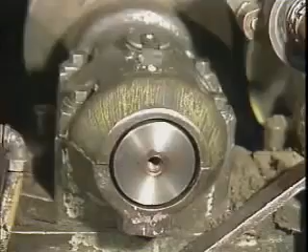Whenever movement takes place between surfaces that are in contact with each other, friction, or resistance to the movement, occurs. Friction between the moving parts of industrial equipment can cause excessive heat and wear. So lubrication is used to help reduce and control friction.

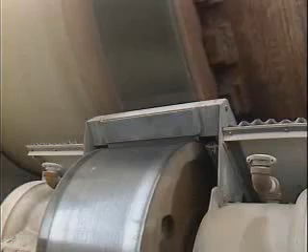Lubrication is the act of applying a substance called a lubricant that creates a slippery barrier between surfaces that would otherwise come in contact. In this part, we'll look at some of the types of friction that can occur. We'll also look at different kinds of lubricants and describe various levels of lubrication.

Moving parts generally experience one or more of three basic types of friction: sliding, rolling, and fluid. Sliding friction occurs when one surface slides across another. This type of friction offers the most resistance to motion, so machines are usually built to minimize or eliminate it.

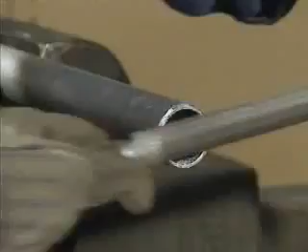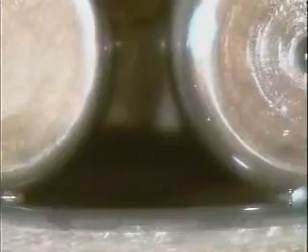One way of building a machine to minimize sliding friction is to place rolling elements between the moving surfaces. This is the principle behind rolling contact or anti-friction bearings. Although rolling contact bearings are used to reduce sliding friction, they do experience another type of friction, rolling friction.

Rolling friction is the resistance to motion that occurs when one object rolls over the surface of another. Rolling friction is considerably less severe than sliding friction, but rolling contact bearings must still be properly lubricated to reduce heat and wear.

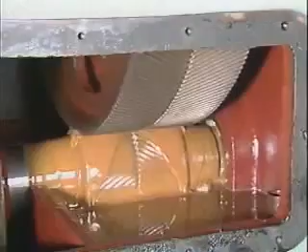Another way to reduce sliding friction is to separate two sliding surfaces with a film of lubricant. As long as the surfaces don't touch, sliding friction is eliminated. Some fluid friction exists within the lubricant, but it's much less than the sliding friction. Fluid friction is the resistance to motion that exists in a fluid. For instance, fluid friction is what makes it difficult to walk rapidly in deep water.

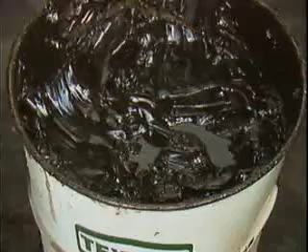Three common kinds of lubricants are liquids, greases, and solids. Liquid lubricants are oils. Mineral oils, which come from refined crude oil, and synthetic oils, which are man-made compounds, are commonly used in industrial applications.

Greases aren't strictly liquid or solid. Instead, they typically soften when the temperature rises and stiffen when the temperature falls. Solid lubricants are made from substances that retain their shape under normal conditions. Solid lubricants include some forms of metal, such as molybdenum disulfide, and several solid chemicals, such as graphite.

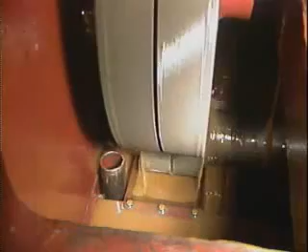When they act as a lubricant, the solid materials create layers that slide over one another. This reduces the friction that would occur if metal parts were in direct contact. Solid lubricants, such as the material whose trade name is Teflon, are also used as chemical coatings that prevent metal-to-metal contact by providing a solid covering for a metal surface.

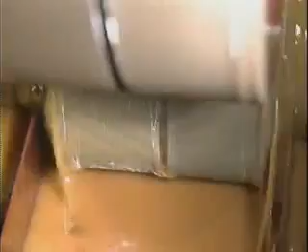Chemical coatings are generally used in combination with another kind of lubricant. For example, if an oil film breaks down and allows two surfaces to come in contact, the chemical coatings provide backup lubrication.

Different levels of lubrication are possible. One level is no lubrication. When there's absolutely no lubricant between moving surfaces, the surfaces are dry. This condition causes the maximum friction between moving surfaces and should be avoided as much as possible, except for applications such as braking, in which maximum friction is desired.

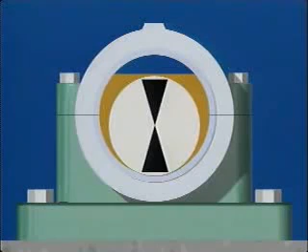A second level of lubrication is mixed film lubrication. To better understand what happens when this occurs, we'll use this illustration that shows a highly magnified portion of two mating surfaces. Under magnification, you can see that the mating surfaces actually have many irregularities, or peaks and valleys.

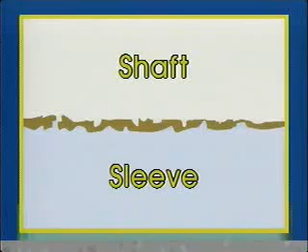Mixed film lubrication occurs when the mating surfaces are only partially lubricated, and metal-to-metal contact occurs between the high points of the surfaces that are moving across each other. Part of the load is relieved by the lubricant, but the high points of the mating surfaces take most of the load, which results in friction and wear of the surfaces. Mixed film lubrication is by no means an ideal situation, but it is a common occurrence.

A third level of lubrication is film lubrication, also called full film lubrication. It occurs when moving and stationary surfaces are separated by a film of oil. Film lubrication is the preferred level of lubrication for bearings. To see the basics of how film lubrication works, we'll use this illustration of a plain journal bearing.

The bearing has a sleeve that surrounds a shaft. The space between the bearing and the shaft contains lubricating oil. While the shaft's at rest, the weight of the shaft squeezes most of the oil out from between the shaft and the bearing. This places the bearing and the shaft in metal-to-metal contact.

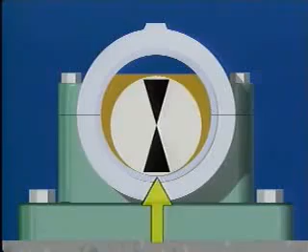But when the equipment is started, the shaft begins to roll slowly, and the motion drags oil underneath the shaft. Oil sticks to the shaft as the shaft turns, and the oil is carried between the two surfaces. The shaft is lifted away from the surface of the bearing by a film of oil. As the rotational speed increases, more and more oil is drawn under the shaft, and eventually, full film lubrication is achieved. The layer of oil supports the shaft and prevents it from touching the bearing surface.

In this part, we'll examine some of the most significant properties of lubricants. One of the most critical properties of liquid lubricants is viscosity.

The thicker lubricant has a greater resistance to flow, so it has a higher viscosity, while the thinner lubricant has less resistance to flow and therefore a relatively low viscosity. The thinner the lubricant, the lower the viscosity.

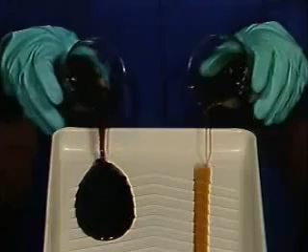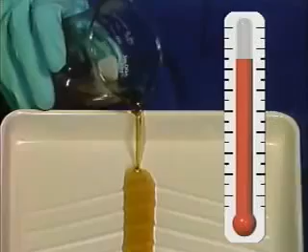Viscosity is affected by temperature. Higher temperatures cause lower viscosity because lubricants thin as temperature increases. On the other hand, lubricants thicken as temperature decreases. Both cases are significant because a lubricant won't lubricate properly if it's either too thick or too thin.

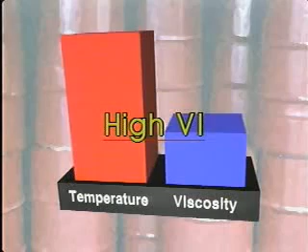If a lubricant is used where large changes in temperature occur, the lubricant's viscosity index is important. The viscosity index is a measure of the lubricant's viscosity change in relation to temperature change. If, when temperature changes a large amount, the lubricant's viscosity changes a small amount, the lubricant has a high viscosity index, or VI. If, when temperature changes a relatively small amount, the lubricant's viscosity changes a large amount, the lubricant

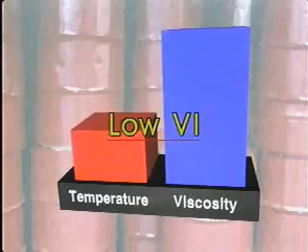has a low VI. Consequently, the temperature at which the viscosity measurement was obtained must be stated. This information is important because the same lubricant will have different viscosities at different temperatures.

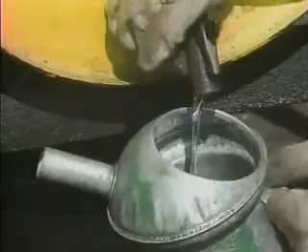In addition to viscosity, several other properties that affect lubricant performance are used by manufacturers as they develop lubricants for various applications. One of these properties is pour point. It's the lowest temperature at which a lubricant will pour or flow. Below the pour point, the lubricant will be too viscous or thick to flow by gravity.

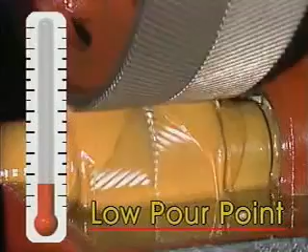A low pour point indicates that the lubricant flows at low temperatures. A high pour point indicates that the lubricant needs higher temperatures to flow. The pour point is especially critical in machinery that must run in cold weather and in equipment that's used in refrigeration systems.

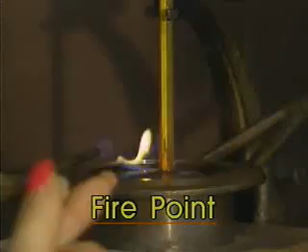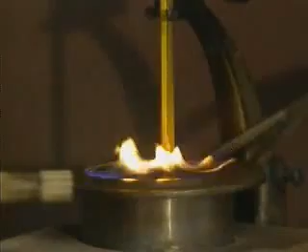Two other temperature-related properties of lubricants are flash point and fire point. The flash point of a lubricant is the lowest temperature at which the lubricant's vapor will ignite when it's exposed to a source of ignition. The fire point is the lowest temperature at which the lubricant will burn steadily when it's exposed to a source of ignition. This occurs because enough vapor is created to cause continuous burning. If either the flash point or the fire point is exceeded, a fire hazard exists.

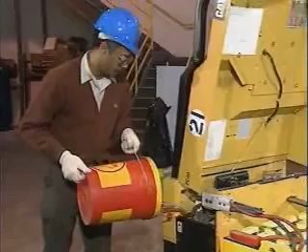Resistance to oxidation is another significant property of lubricants. It refers to a lubricant's resistance to reacting chemically with oxygen when exposed to heat and air. You see, many industrial lubricants are made from hydrocarbons. When the hydrocarbons are exposed to heat and air, the chemical reaction called oxidation occurs.

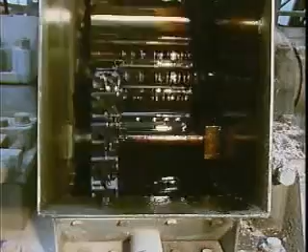Oxidation causes chemical changes that destroy a lubricant's effectiveness and lead to the creation of deposits such as sludge and varnish. Oxidation also produces acids that cause rust and corrosion. The oxidation process is normally slow, and over time, most lubricants do tend to oxidize. Oxidation can speed up, however, if the lubricant splashes around excessively or if it's exposed to high temperatures.

A lubricant's resistance to forming an emulsion is also important. Basically, an emulsion is a mixture or suspension of components that are difficult to separate once they've been combined. The process that causes the formation of an emulsion is called emulsification. A lubricant that resists forming an emulsion is usually desirable because an emulsion of lubricant and water has poor lubricating qualities.

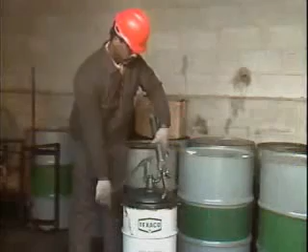Equipment manufacturers generally specify appropriate lubricants for their equipment, depending on how the equipment will be used. In turn, workers are responsible for making sure that they use the type of lubricant that's been specified. Various factors determine the appropriate lubricant for a given situation. For instance, pressure or load affects the selection of a lubricant.

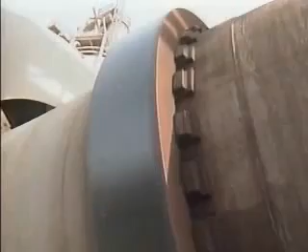An application with relatively high pressure requires a lubricant that won't flow away from where it's needed when the pressure increases, such as when gear teeth mesh. Applications that involve relatively high loads or pressures typically require greases, solid lubricants, or high viscosity oils. Speed is also a factor in lubricant selection because there's a higher rate of wear at high speeds than at low speeds.

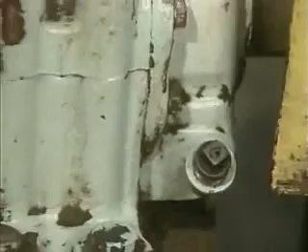Generally, low viscosity oils provide lower friction and better heat transfer at high operating speeds than high viscosity oils do. In short, low viscosity lubricants are more suitable for components such as certain bearings where the loads are light, the speeds are high, and the system is fully enclosed. High viscosity lubricants are more suitable for components such as open gears where the speeds are low, the loads are high, and the system is not enclosed.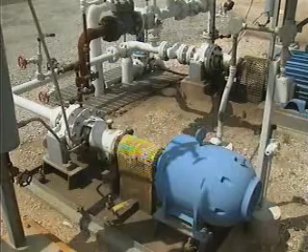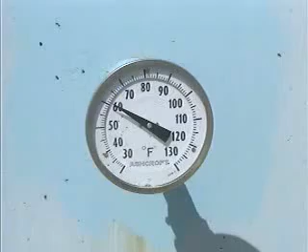Temperature also affects a lubricant's viscosity. If wide, rapid variations in temperature are involved, a lubricant with a high viscosity index is usually needed. Temperatures must not exceed the lubricant's flash point and fire point. On the other hand, temperatures must not be lower than the lubricant's pour point.

Substances or conditions in the environment where a lubricant will be used also affect lubricant performance. For example, a lubricant must be able to withstand chemicals that may tend to break down the lubricant. And if there's water in a system, a lubricant that resists emulsification is usually required.

In most cases, lubricants contain additives which also affect lubricant selection. An additive is a substance that's added to a lubricant to provide or improve a specific property. Such substances are usually added by the lubricant manufacturer.

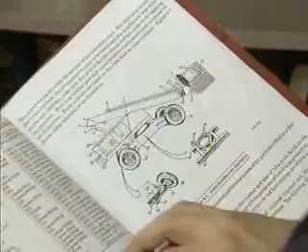To make sure that they use the correct lubricant for a specific piece of equipment, workers usually refer to the lubrication chart that's supplied by the equipment manufacturer. The lubrication chart applies only to that particular piece of equipment, and it should not be used as a lubrication guide for any other equipment.

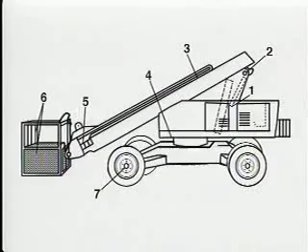Often, each lube point or equipment part that requires lubrication, as indicated on the lubrication chart, is shown and numbered on an illustration that accompanies the chart. In turn, the numbers from the illustration are listed on the lubrication chart, in this case, in the index numbers column. For instance, item number 2 from this illustration is identified as the boom pivot shaft on this simplified lubrication chart.

Reading across that line on the chart, you can find the number and type of lube points, in this case, 2 grease fittings, and the recommended type of lubricant and method of application, in this case, multi-purpose grease, abbreviated as MPG, applied with a pressurized grease gun or pressure gun. You can also find out how frequently the boom pivot shaft should be lubricated, which is every 10 hours.

Proper storage of lubricants is essential to prevent contamination and unnecessary waste of the lubricants, as well as fires, spills, and accidents. For these reasons, the federal government and many state governments have strict regulations that apply to the storage and handling of lubricants. In this part, we'll cover some basic procedures for ensuring that lubricants are stored safely.

After lubricants have been delivered, they're often stored in their containers for a long time before they're used. Depending on a facility's available space, the containers may be stored indoors or outdoors. Two major problems with outside storage are dirt and weather. So store lubricants in a location where there's a minimum of dust and dirt. Also, use a temporary covering like a tarp or a permanent covering like this three-sided shed to protect the containers from the weather.

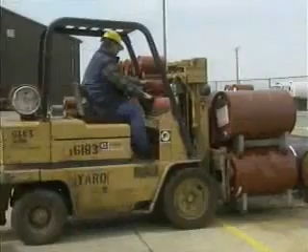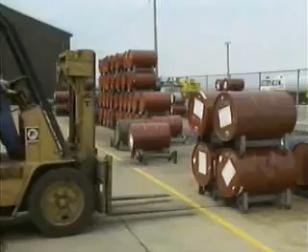Generally, metal drums of lubricant should be stored either upright on pallets or horizontally on racks that keep the containers off of the ground. You see, storing a metal drum on a rack keeps the metal of the drum from contacting the ground or standing water. This helps prevent the destructive chemical reaction of corrosion from occurring.

In addition, storing a drum on its side prevents water from collecting on the top of the drum. Water that's allowed to collect here can eventually penetrate the seal around the drum's opening and contaminate the lubricant that's inside the container.

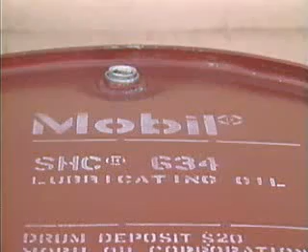Most lubricants are combustible, which makes fire a hazard that's associated with storing these materials. One reason for storing lubricants outdoors is to minimize the damage from a fire by keeping the lubricants away from buildings, equipment, and work, such as welding or cutting, that involve sparks or open flames. Also, always keep an appropriate type of fire extinguisher in the storage area.

When lubricants are stored indoors, weather is less of a problem than with outdoor storage. But contamination, spills, and fire are still hazards that must be dealt with. Store lubricants in a fireproof room or building that's clean, well lighted, and well ventilated. The storage area should have a fire extinguishing system that can be controlled manually as well as automatically. Also, keep an appropriate type of portable fire extinguisher in the storage room.

Position storage racks or shelves so that all lubricants can be reached easily. Make sure that all containers are plainly marked to identify their contents, and store the containers so that their markings can be clearly seen. If possible, store opened lubricant containers and containers of contaminated lubricants separately from new unopened containers.

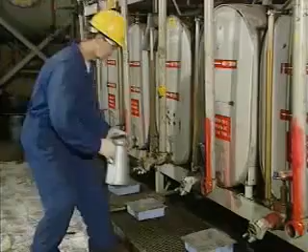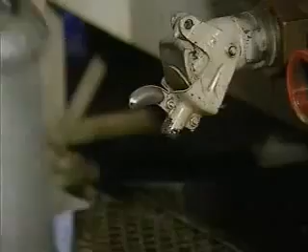To dispense lubricant from a drum by gravity flow, store the drum in the horizontal position on a rack and equip the drum with a spigot that has a drip-proof valve for withdrawing the lubricant. If you must store a drum in the vertical position, you'll probably have to pump the lubricant out of the drum. Store cans or pails of lubricant neatly on shelves or on the floor. Finally, repair leaks promptly and clean up any drips or spills immediately.

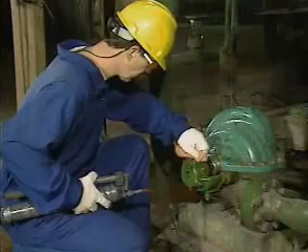In this part, we'll look at common types of lubrication equipment for industrial applications. We'll begin with a grease gun. Hand-operated grease guns, or lever guns, are often used to grease bearings. Typically, the nozzle end of the gun is attached to a grease fitting on the bearing housing, and the gun's hand lever is pumped to apply grease through the fitting to the equipment's bearings. Grease guns enable you to develop high pumping pressure with little effort.

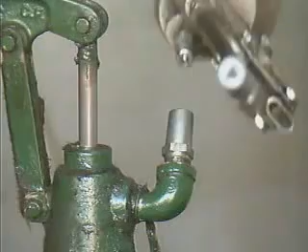In fact, grease guns can develop pressures in excess of 10,000 psi, which can damage seals. So you must operate grease guns with care. A very common way of filling some hand-operated grease guns is simply to slip a cartridge of grease into the barrel of the gun. Other types of grease guns can be filled quickly and easily with a filler pump that's clamped onto a bulk grease container, then attached to the gun.

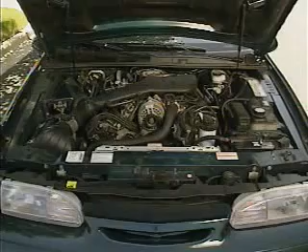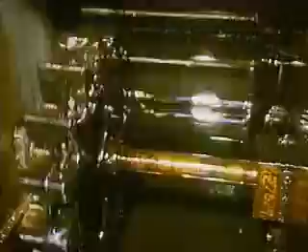Internal lubricators are typically used for the bearings of an internal combustion engine, an air compressor, or a gearbox. In this gearbox, oil is pumped from a reservoir through oil lines inside the machine. Then a gear that's mounted on a separate shaft rotates through the lubricant that's inside the gearbox and carries the lubricant onto the other gears.

In this part, we'll talk about some standard procedures and precautions that are associated with handling and dispensing lubricants. Generally, when a lubricant is needed in a facility, workers move the lubricant containers from bulk storage to a central location in the facility where the lubricant can be dispensed. If a lubricant is taken from outside storage in cold weather, it should be allowed to warm up indoors before it's used. Low temperatures can thicken lubricants and make them unusable until they've been thoroughly warmed.

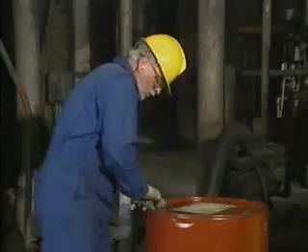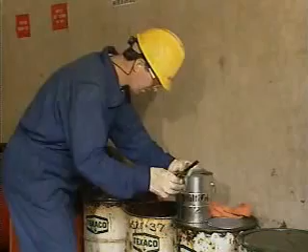As a rule, a lubricant container should be cleaned before it's opened to prevent dirt or debris from the container getting into the lubricant. When a container is opened and lubricant is removed, the container should be resealed as soon as possible to protect the remaining lubricant from contamination. Different lubricants may have incompatible additives, so when a lubricant is added to a partially full system, the type of lubricant that's added must usually be the same as the type of lubricant that's already present.

When more than one lubricant is dispensed from the same location in a facility, it's important to identify each lubricant properly. Of course, the original shipping container must clearly state what lubricant the container holds. But any time a lubricant is placed in another container, the new container must also be clearly and correctly labeled. Lubricant should never be returned to its original container after it's been removed. That could contaminate the entire contents of the container. Likewise, contaminated or waste lubricant storage must be clearly marked.

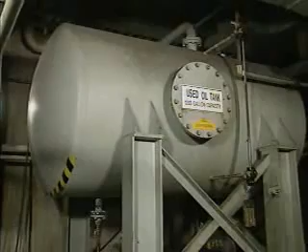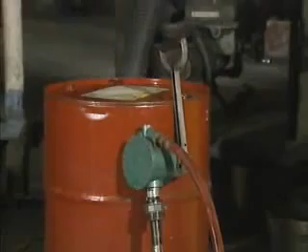Different methods can be used to remove or dispense lubricants from their containers so that the lubricants can be put to use. We'll look at two of the most common methods for dispensing oil. One way to dispense oil from a drum or a barrel is to use a barrel pump that fits into the container. The first step in installing a barrel pump is to clean off the top of the drum. Then open the drum, and if there's a drum seal, remove it. Next, clean the pump and insert it into the drum. And finally, tighten the pump securely to the drum.

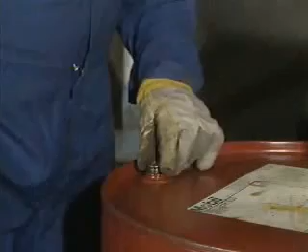For the barrel pump to work properly, the drum must be vented. This is usually done by removing a small vent cap from the top of the drum before you start to pump. When you're done pumping, replace the vent cap to prevent contamination of the lubricant. Another way to dispense oil from a drum is with a spigot that has a leak-proof valve. The drum must be positioned on its side.

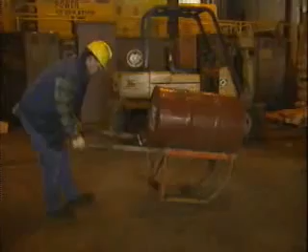Sometimes, a drum with a spigot is placed in a rocking frame. To dispense oil from the drum, the frame is rocked forward so the drum lies on its side. The drum may then be left in this position until it's empty, or if necessary, it can be rocked back into the upright position. With the drum vented, open the spigot and withdraw the oil from the drum. When the desired amount of oil has been withdrawn, close the spigot and the vent cap.

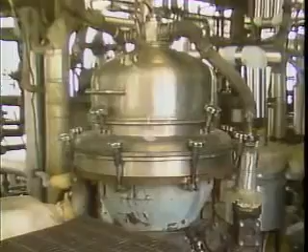When lubricating oil becomes contaminated or can no longer provide adequate lubrication, it must be replaced with fresh oil. Oil is usually changed according to a schedule that's established by the equipment manufacturer. Also, in many cases, contaminated oil can be purified and reused. Oils are often divided into several common groups based on the uses for which the oils are suitable. One group of oils is circulating oil. Circulating oil flows or circulates through a piping system or moves freely within a closed area.

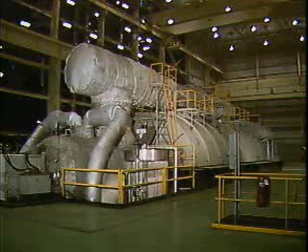The circulating oil group also includes hydraulic oil. Hydraulic oil is primarily used to transfer force from one component to another in a system. Sometimes, though, the same circulating oil is used for both lubrication and hydraulics. For example, large steam turbines are often built to use the same oil for lubrication and for hydraulic control. In equipment that's operated in low temperatures, a circulating oil's pour point must be low enough to allow the oil to flow freely. Also, the viscosity index of a circulating oil is very important if the system in which the oil is used experiences large changes in temperature.

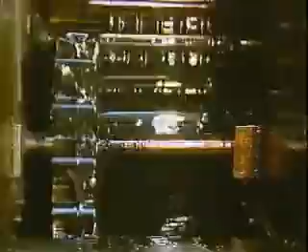Gear oil is a type of oil that's used primarily for lubricating gears, although it may be used to lubricate many other devices as well. Various gear oils are available. A gear oil may be a straight mineral oil, or it may contain additives to improve the oil's load-carrying ability and its performance in high-pressure applications.

Viscosity is a critical property for gear oil because an oil that's too thin will be squeezed out from between the gear teeth and won't protect them. But the oil must also be able to flow freely enough to help cool the gears. An oil that's too thick will cause the gears to overheat because of high fluid friction.

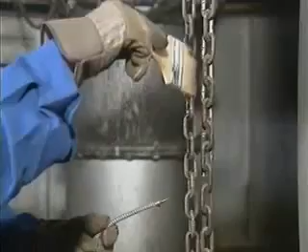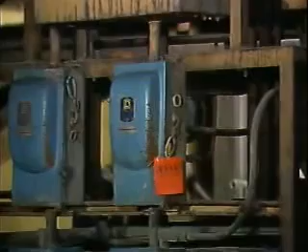Manual oiling often involves wiping or brushing oil onto moving parts, such as chains and wire rope. To prevent personal injury when applying lubricants manually, workers must always use the appropriate personal protective gear. Workers must also make sure that the equipment is shut down and properly tagged and locked out before they apply the lubricant.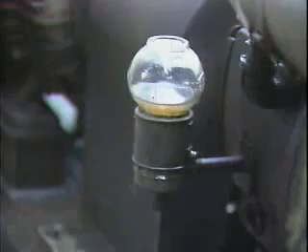Some bearings have a small oil cup or reservoir that dispenses oil automatically as the oil level in the bearing decreases. To maintain the proper oil level in the bearing, workers must check the level in the oil cup regularly and add oil as necessary. The oil cup should be cleaned before it's used. Dust and dirt that enter the bearing with the oil can lead to bearing failure.

Centralized oiling is a lubrication method in which oil is automatically applied to the moving parts of several machines by an independent, centralized oiling system, such as the one illustrated here. But to be sure that the proper oil level is maintained, workers must check the level in the reservoir on a regular basis and add oil when necessary.

Finally, applying oil to lubricate bearings is a critical maintenance task in most industrial facilities. One of the most common problems associated with lubricating bearings is over-lubrication. The application of too much lubricant can cause an increase in operating temperature and a decrease in viscosity. Then, if the lubricant becomes too thin, it can't carry the load inside the bearing. As a result, the bearing will fail and have to be replaced.

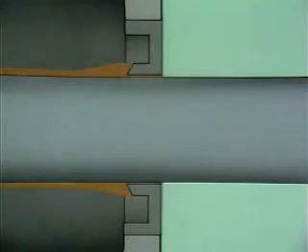Also, too much lubricant being forced into a bearing may burst the bearing seals. This in turn allows the lubricant to escape from the bearing while contaminants are allowed to enter. Certain properties unique to grease determine the appropriate grease for a particular application. One such property is drop point.

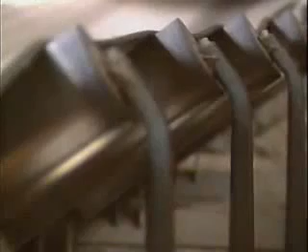Drop point refers specifically to the melting point of a grease. The term is derived from the method that's used to measure this property. The grease is heated slowly until fluid begins to drop from the grease. The temperature at which the drops form is the drop point. If the operating temperature in an area is higher than a grease's drop point, the grease tends to flow away from the area that needs lubrication. So a grease's drop point is normally considered the highest temperature at which the grease can be used.

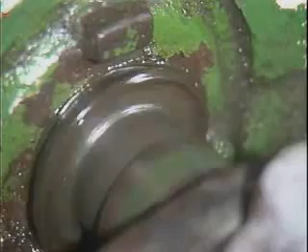Some greases don't have a drop point. Instead, when heat is applied, the grease begins to decompose chemically before it reaches the point where the thickener in the grease would break down and drops would form. A grease's consistency or stiffness is an important physical property for much the same reason as drop point is. If a grease is too hard, it will be difficult to apply. But if it's too soft, it may flow away from where it's needed. Either of these situations could result in inadequate lubrication and damaged equipment.

The consistency of a grease varies with temperature, and there's generally an increase in the softening of a grease as the temperature increases. For these reasons, consistency is a critical property to consider when grease is selected for a particular application. The National Lubricating Grease Institute, NLGI, has developed a widely used classification system of grease consistencies. In this system, grease consistencies are designated by NLGI numbers that range from 000 for the softest to 6 for the stiffest.

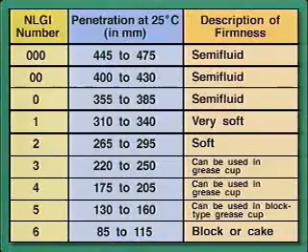If a grease must be pumped through a centralized greasing system, the grease's pumpability should be considered. Pumpability is a measure of how easily a grease can be moved or pumped through a centralized greasing system without clogging the pipes or the components in the system.

The water resistance of a grease is an important property if the grease will be used with machinery that can be damaged by water. Many greases break down or dissolve when they come in contact with water, but most greases that contain thickeners such as calcium or lithium soap, which are insoluble in water, resist water very well.

The ability of a grease to retain its chemical and physical properties when subjected to extreme temperatures or exposed to reactive substances is referred to as the grease's stability. In many applications, it's crucial to use a stable grease to protect the equipment that's being lubricated. Bearing applications are especially sensitive to instability.

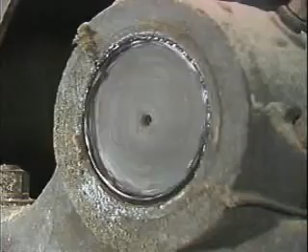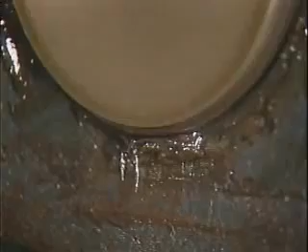If the grease in a bearing breaks down from the heat that's generated during operation, the grease will leak out and leave the bearing dry, causing the bearing to seize. A stable grease, on the other hand, resists breaking down due to temperature increases or exposure to air, water, or reactive chemicals.

There are various reasons for using grease, most of which depend on the operating conditions in a given situation. Under certain conditions, grease may be necessary to ensure that the lubricant will stay in place. As long as grease remains semi-solid, it tends to stay where it's put. Oil is much more likely to flow away from where it's needed than grease is.

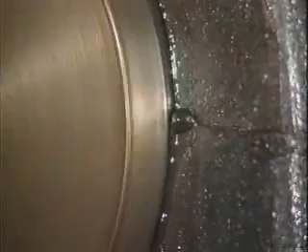Even when both oil and grease would flow out of an area, it's much easier to retain grease with a seal than it is to retain oil. Keeping the lubricant in place is important because leaking lubricant could contaminate surrounding areas or cause a fire hazard. Another reason for using grease is that grease may be required to assure that contaminants are prevented from getting between lubricating surfaces.

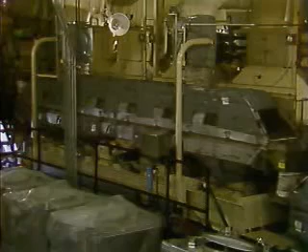In some high-temperature applications, such as this conveying dryer, grease with a high-temperature thickener is used to keep the lubricant in place. It's possible to use oil in high-temperature situations, but additional equipment, such as this cooler, must usually be provided to cool the oil.

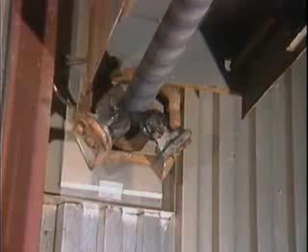Greases are also used to lubricate bearings in low-speed applications that don't generate much heat. Grease is frequently used when the running speed of a plain journal bearing doesn't exceed 200 to 300 revolutions per minute, or RPM. Finally, lubrication doesn't have to be done as often with grease as it does with oil. So grease is commonly used in situations where frequent oil lubrication is difficult to accomplish.

In this part, we'll look at some typical examples of how to apply grease for proper lubrication of industrial equipment. Sometimes workers apply grease manually with a brush, clean cloth, or their gloved hands. The workers must use the required personal protective gear and make sure that the equipment is turned off, locked out, and tagged before they apply the grease.

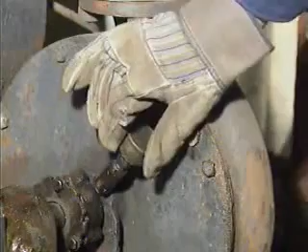Sometimes workers apply grease to operating equipment by turning a screw-type cup to force grease into a component such as a bearing. The level of grease in the cup must be checked regularly. If the level is low, the cup must be refilled.

Anti-friction bearings often have housings that retain grease and help keep out dirt. But a problem can occur if too much grease is put into the bearing because there's no place for the excess grease to go. Consequently, a way for old grease to leave the bearing must be provided. In this example, the housing has a drain hole. To prepare to grease the bearing, remove the plug from the drain hole and wipe the grease fitting clean.

Then connect the grease gun to the fitting and slowly add the specified amount of new grease while the machine is running. Don't overgrease the bearing. Typically, with a hand-operated grease gun, you should apply no more than 3 shots of grease at a time. Next, disconnect the grease gun from the fitting and wipe the fitting clean.

Then, allow the machine to run for a few minutes with the drain plug still removed. As the machine operates, excess grease will be forced out of the drain hole. After a few minutes, wipe the drain plug clean and put it back in the drain hole.

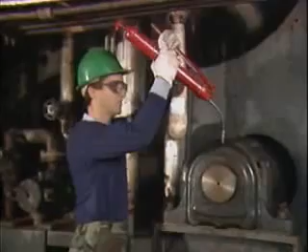Greasing a sliding surface bearing, such as this plain journal bearing, is a relatively simple procedure because the design of the bearing housing doesn't cause grease to be retained in the housing. The usual practice is to apply grease to a grease fitting on the housing with a grease gun while the equipment's shaft is turning. This procedure is generally continued until new grease is forced out of both ends of the bearing. Any excess grease will rapidly work its way out.

In this topic, we talked about oils and greases and some of the different methods for lubricating equipment with these types of lubricants. To check your understanding of the material that we covered, try answering some practice questions.